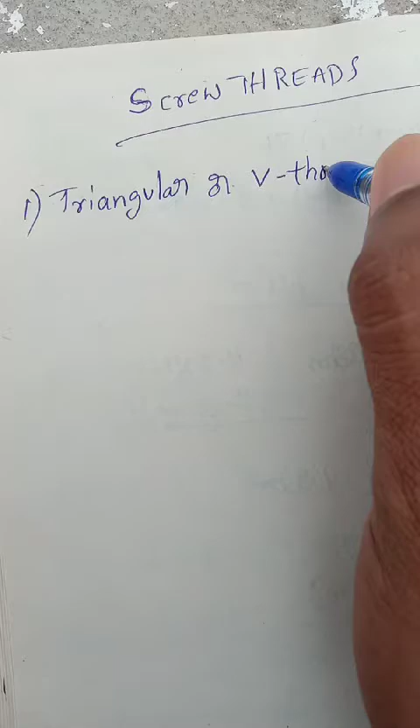స్క్రూ థ్రెడ్స్. దీంట్లో ఫస్ట్ వన్ వచ్చేసరికి మనకి ట్రయాంగులర్ ఆర్ వి థ్రెడ్స్.

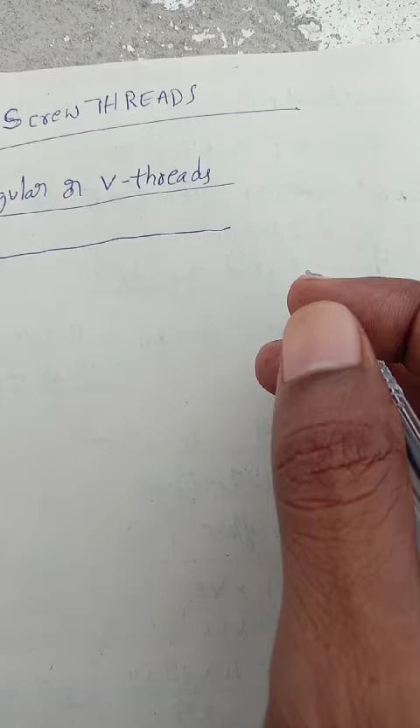ఓకే, నౌ ఈ ట్రయాంగులర్ ఆర్ వి థ్రెడ్స్ ఎలా ఉంటాయి అనేది ఇప్పుడు చూద్దాం మనం. మనకి ప్రాబ్లంలో ఇక్కడ వచ్చేసరికి ఏంటంటే డయామీటర్ ఇవ్వచ్చు. ఓకే, సో దాన్ని బట్టి మనం పిక్చర్ ఎలా డ్రా చేయాలనేది మనం ఇక్కడ చూడాలి.

ఓకే, ఇప్పుడు యాక్చువల్గా షేప్ ఎలా ఉంటుంది అనేది మాత్రమే నేను డ్రా చేస్తున్నాను.

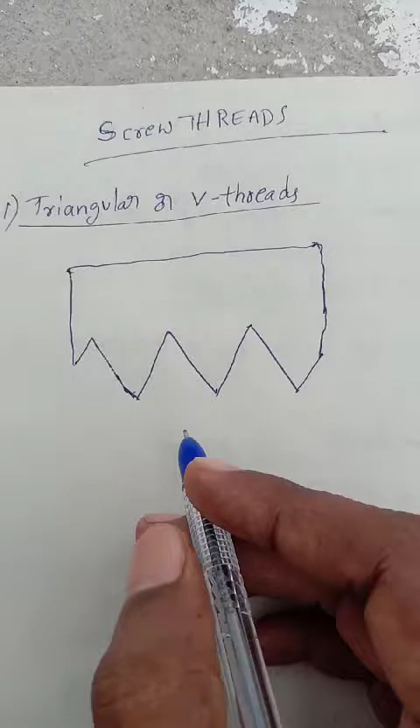మనం చూసుకున్నట్లయితే లుక్ ఎట్ దిస్, ఈ విధంగా ఉంటుంది. ఏదైతే బ్యాలెన్స్ మిగిలిపోయిందో చూడండి, ఈ పార్ట్లోకి మనకి ఇన్సర్ట్ అవుతుంది.

Exactly like this. Okay, this is shape of the thread.

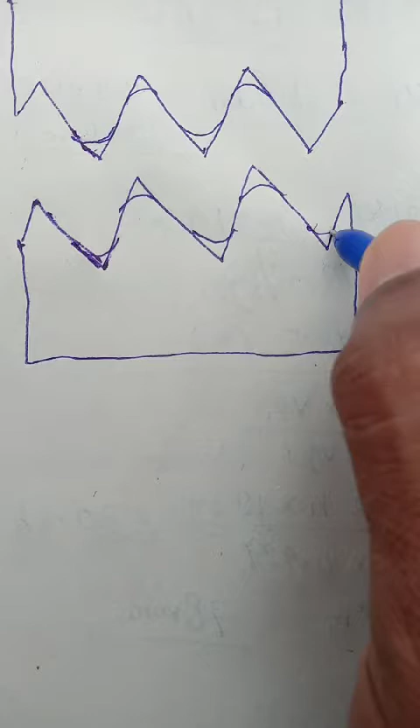అలాగే కింద కూడా మనం కర్వ్ షేప్ పెట్టుకోవచ్చు. అండ్ అగైన్ హియర్ ఆల్సో we can here also. Okay, so this is the thread.

Now here this is internal and this is external.

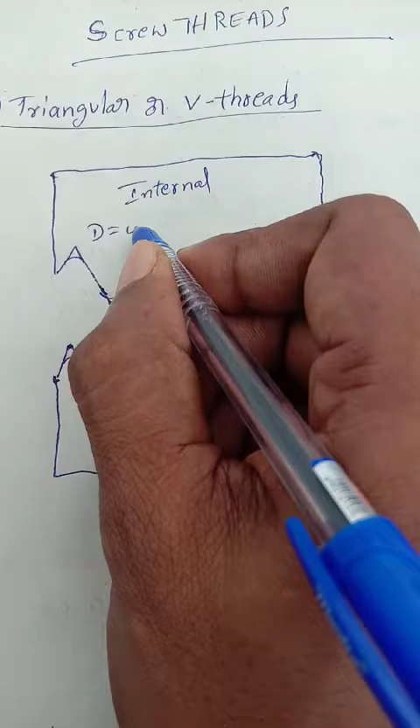Okay, so D is equal to 0.86 పిచ్ అనేది ఇంత ఉండాలి. ఓకే, అంటే మనకి డయామీటర్ కనుక ఇచ్చాడనుకో, గివెన్ డయామీటర్ 20 అంటే 20 ఇంటూ పి. ఓకే, క్యాలిక్యులేట్ చేసుకుంటూ వెళ్ళిపోవటం. అంటే పి వాల్యూ కావాలంటే ఇప్పుడు మనకి 20 డివైడెడ్ బై 0.86 వేసామంటే పి వాల్యూ వస్తుంది, పిచ్ వాల్యూ.

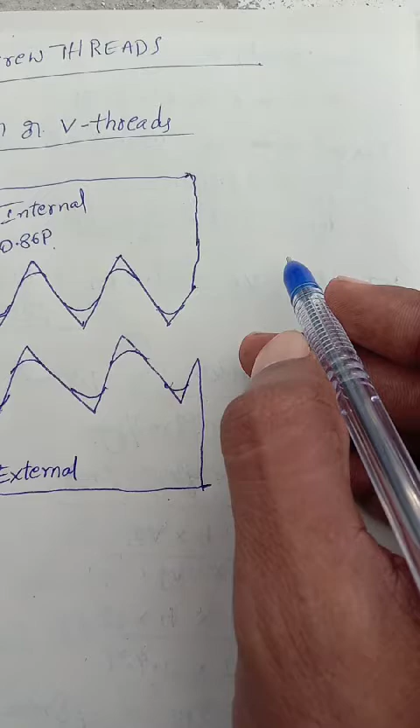ఓకే, అండ్ దెన్ హియర్ ఐఎమ్ గోయింగ్ టు see here D, small d is equal to 0.54 p. ఓకే, స్మాల్ పిచ్. ఒకవేళ క్యాపిటల్ డి ఇవ్వకుండా స్మాల్ డి కనుక ఇచ్చినా కూడా మనం ఇక్కడ ప్రాబ్లం అనేది సాల్వ్ చేయొచ్చు.

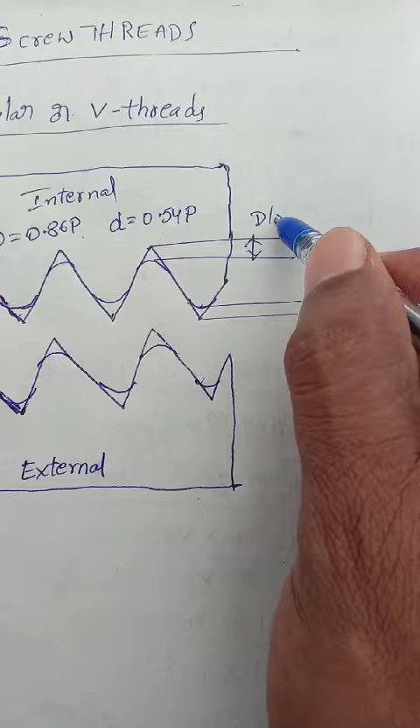అండ్ హియర్ టు హియర్ డిస్టెన్సెస్, అలాగే ఈ వీటికి ఏంటి అనేది ఇప్పుడు చూద్దాం. మనం చూసుకున్నట్లయితే ఇక్కడి నుంచి ఇక్కడికి D/8 డిస్టెన్స్ ఉండాలి. అలాగే ఇక్కడి నుంచి ఇక్కడికి వచ్చేసరికి ఏంటంటే మనకి ఇది స్మాల్ డి, అండ్ ఇక్కడి నుంచి ఇక్కడికి మనకి D/4 డిస్టెన్స్ ఉంటుంది.

ఓకే, నౌ హియర్ టు హియర్ ఈజ్ ది diameter D.

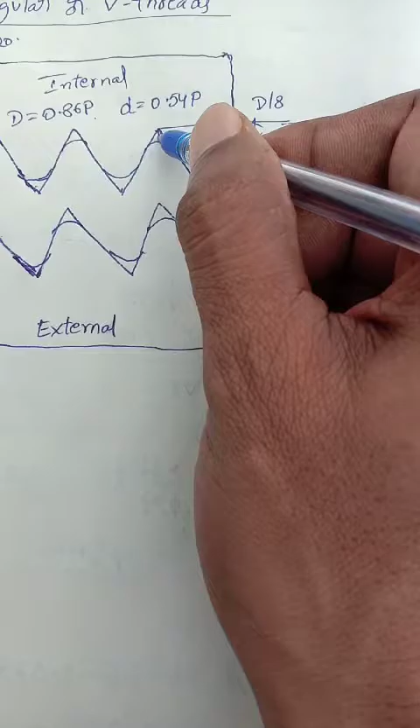Okay, now we need to see what is pitch. Look at this, here to here, అలాగే here to here. The main point is called pitch.

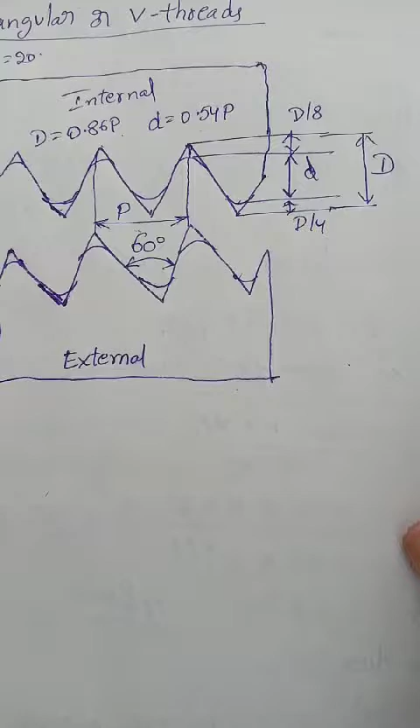Okay, this is pitch, and now here you see in between this angle is having 60 degrees. In between this angle is having 60 degrees, and now we are going to see

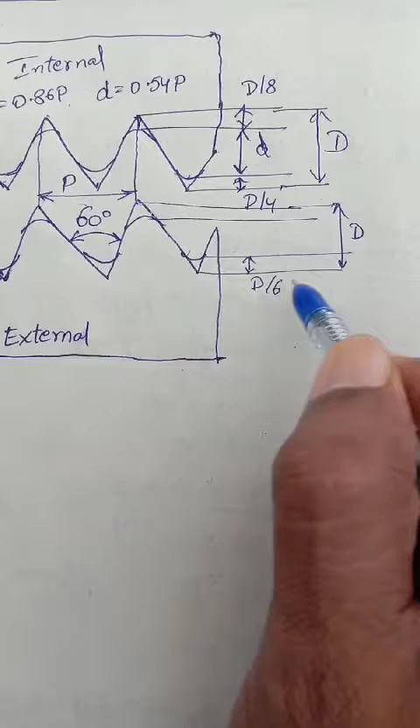similarly this is D, and this one coming from D by 6, so this is similarly D by 8, and now this is small d.

ఎక్స్టర్నల్ థ్రెడ్ వచ్చేసరికి మనం ఈ విధంగా మెయింటైన్ చేసుకోవాలి, D/8 D/6. ఇంటర్నల్ థ్రెడ్ వచ్చేసి D/4, ఇక్కడికి వచ్చేసరికి D/8. వై? బికాస్ దిస్ D/8 ఈస్ ఇన్సర్టెడ్ ఇన్ హియర్.

ఓకే, now come to here, this is equal to same thing 0.86p. అలాగే స్మాల్ d is equal to 0.61p. we take these values.

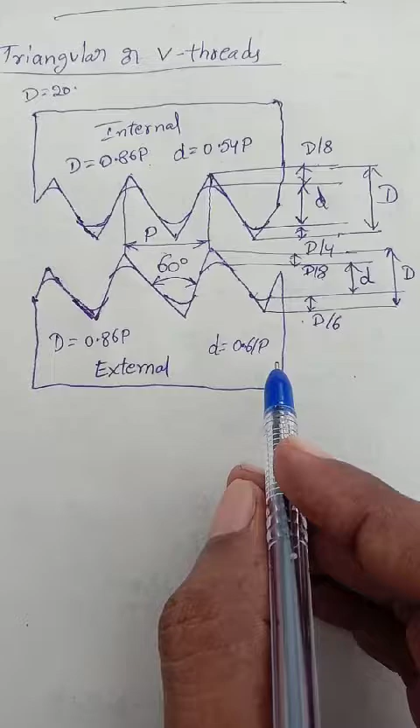So totally this is the యూనిఫైడ్ థ్రెడ్ అని కూడా చెప్పుకోవచ్చు. దీన్ని మనం ఈ టైప్స్ ఆఫ్ థ్రెడ్ని యూనిఫైడ్ థ్రెడ్ చెప్పుకోవచ్చు. సో ఇది ఒక మెటల్ కాబట్టి వీఆర్ గోయింగ్ టు డూ హ్యాచింగ్ లైక్ దిస్.

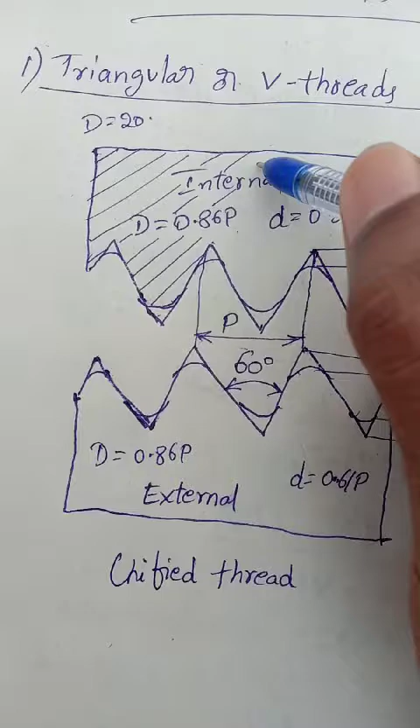So we are going to do the hatching like this.

యాంగిల్ వచ్చేసరికి 45 degrees తీసుకోండి. లైన్ టు లైన్ స్పేస్ యాక్చువల్గా అయితే 2 mm ఉండాలి, బట్ యూ కెన్ టేక్ అవర్ కన్వీనియంట్ డిస్టెన్స్ టు డ్రా దిస్ హ్యాచింగ్ లైన్స్.

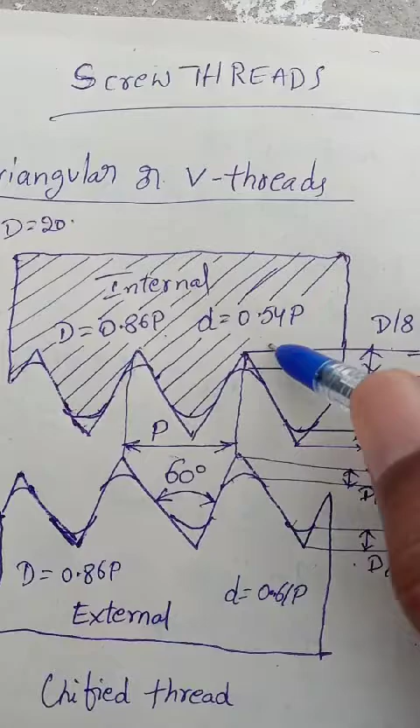అలా అని చెప్పేసి మరీ డార్క్గా డ్రా చేయకూడదు, మరీ లైట్గా కాకుండా మీడియం సైజ్ వచ్చేటట్టుగా డ్రా చేసుకోండి. ఈ విధంగా లైన్ థిక్నెస్ అనేది కొంచెం మీడియంగా ఉండేటట్టు చూసుకోండి.

అలాగే సిమిలర్లీ వీఆర్ గోయింగ్ టు డూ బాటమ్ ఆల్సో. Why? Because this is one part and this is another part. Okay, we show like that, opposite direction. We can draw opposite direction.

ఓకే, ఆపోజిట్ డైరెక్షన్లో మాత్రమే మనం వీటిని యాడ్ చేసుకోవాలి, ఎందుకంటే సపరేట్ పార్ట్స్ వి షో ది దిస్ ఈజ్ వన్ పార్ట్ అండ్ దిస్ ఈజ్ అనదర్ పార్ట్. ఇది చాలా ఇంపార్టెంట్ థింగ్ మనకి హ్యాచింగ్లో.

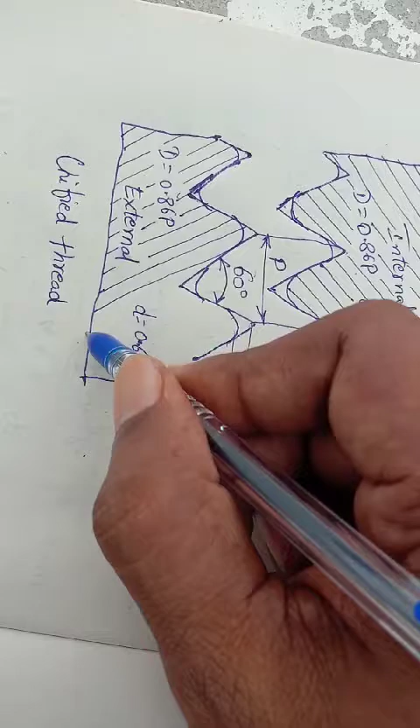Like this. Okay, this is the procedure to draw the triangular or V threads.

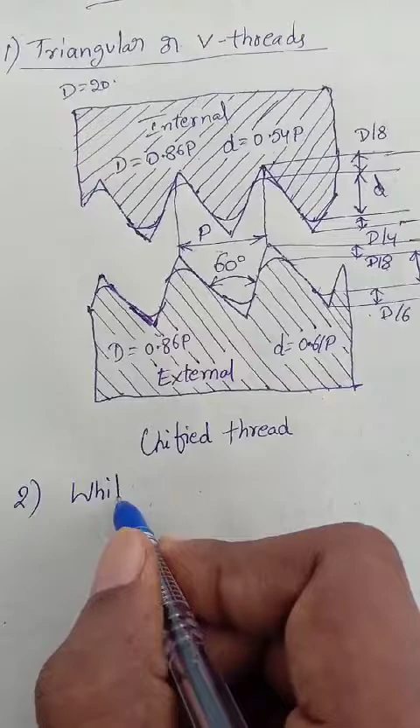Okay, and now we go for another one. It is called Whitworth thread. And next one is coming to here. White worth thread.

Okay, so now we will going to see how to draw Whitworth thread.

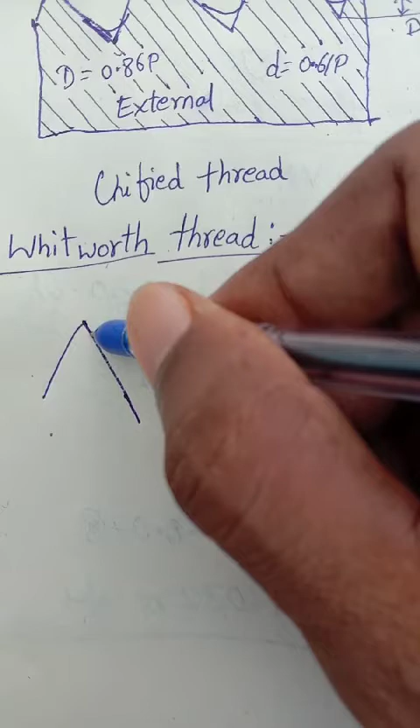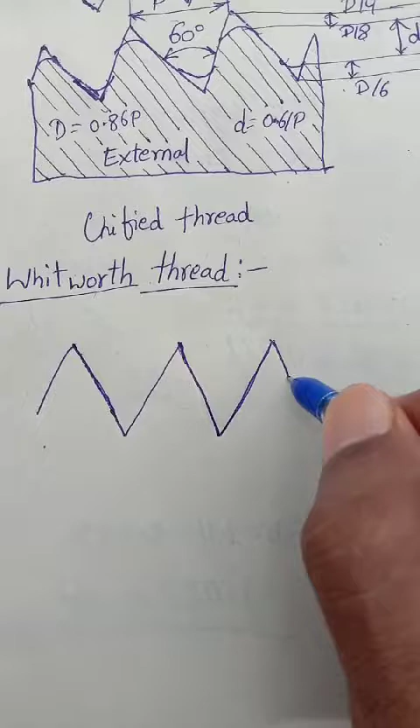This is in straight line, equal size undali. ఇక్కడ కూడా మనకి ఈక్వల్గా ఉండేటట్టు చూసుకోవాలి. ఈ షేప్ అనేది చాలా ఇంపార్టెంట్ థింగ్. మనకి షేప్ అనేది తెలియలేదనుకోండి, పిక్చర్ గీయలేము. So this is Whitworth thread.

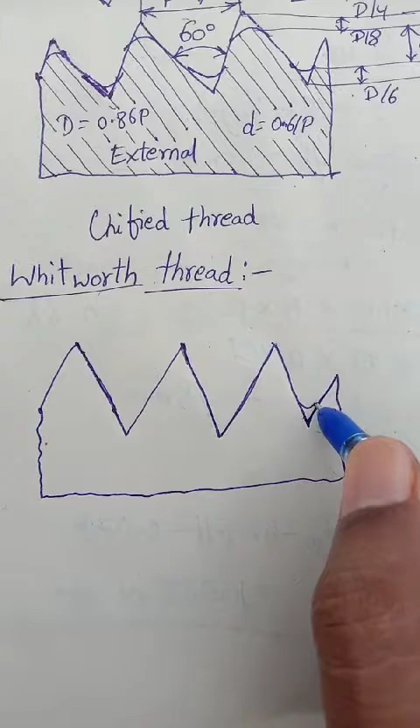Okay, now here this is also same length. And then now here also we draw like this. You know very well this is pitch.

Here also diameter is given. సో ప్రాబ్లం డయామీటర్ ఇచ్చినప్పుడు ఆ డయామీటర్ని బట్టి మనం ఈ టైప్ ఆఫ్ థ్రెడ్ని మనం డిజైన్ చేసుకోవచ్చు.

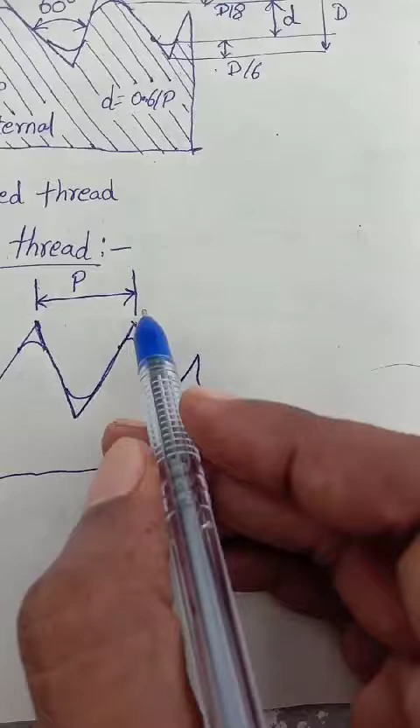లుక్ ఎట్ దిస్ యాజ్ యూజువల్ సిమిలర్ వే. హియర్ ఈస్ D/6. Similarly here also having D/6. So the in between distance is here d, and now this distance is called capital D.

Now small d, pitch is equal to 0.64 p. అదే capital D కనుక ఇచ్చినట్లయితే మనకి 0.96 p.

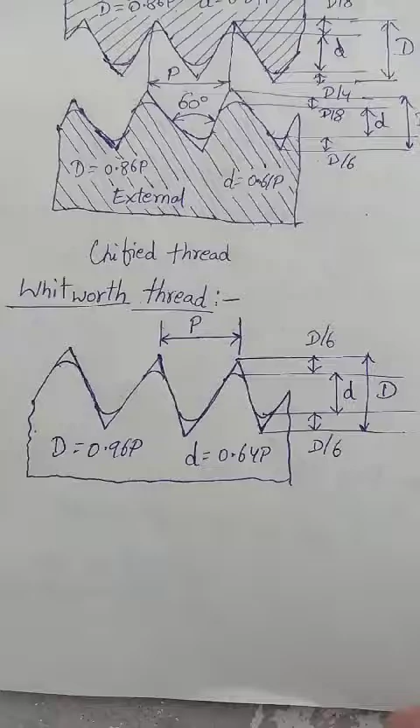Okay, now here in between angle we take in 55 degrees. ఓకే, వైట్ వర్త్ థ్రెడ్ వచ్చేసరికి ఏంటంటే ఇన్ బిట్వీన్ యాంగిల్ మనకి 55 degrees ఉంటుంది. ఓకే రైట్.

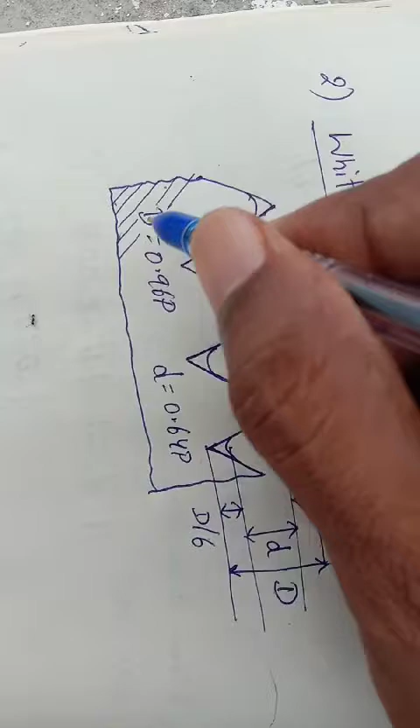సో నౌ వీఆర్ గోయింగ్ టు డూ హ్యాచింగ్. Like this.

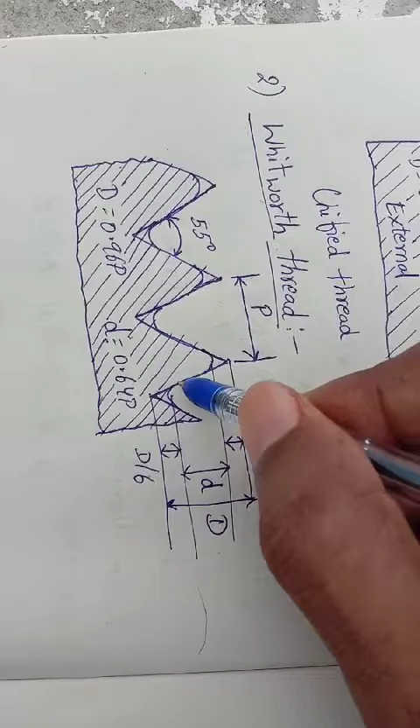Okay. Like this. Okay.

So now this is called Whitworth thread. Okay.

Now we are going to see next one is called Sellers threads. Now here Sellers threads. Now we are going to see how to draw Sellers threads. Okay, yeah. Take here.

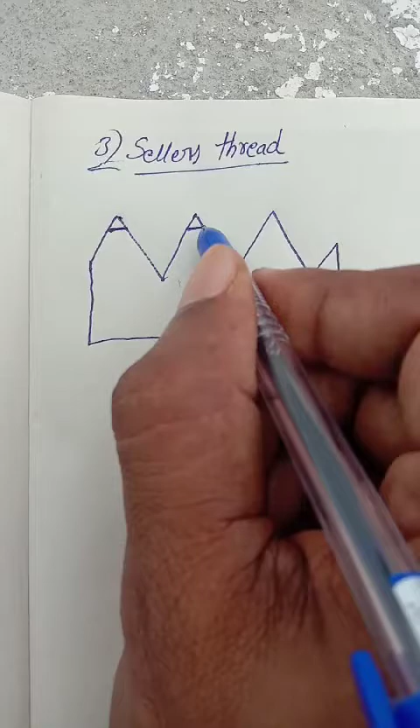But here look at this, since Sellers threads it's having straight line. That is the difference between previous threads and this one. Okay, so you can see that in between angle is 60 degrees.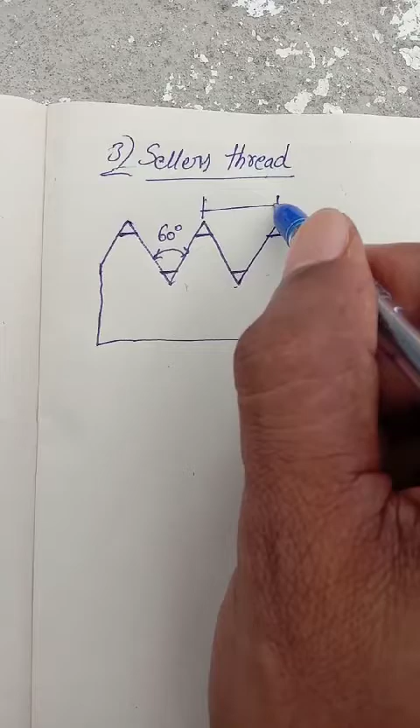ఈ పాయింట్ నుంచి ఈ పాయింట్కి యాస్ ఇట్ ఈస్ పిచ్ ఇవేవి మారవు. ఓకే,

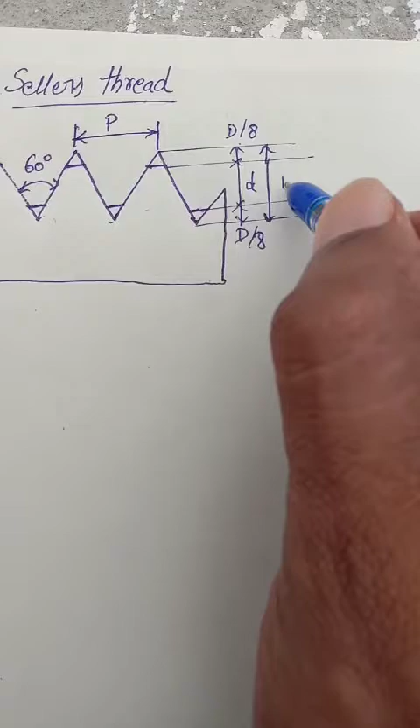So what is the distance we need to fix here? So this is d by 8, small d, and similarly here also d by 8, and then now this is coming from d. Thus we know.

Again here d is equal to 0.86 p. Now small d is equal to 0.649 p. So this is the design of Sellers thread.

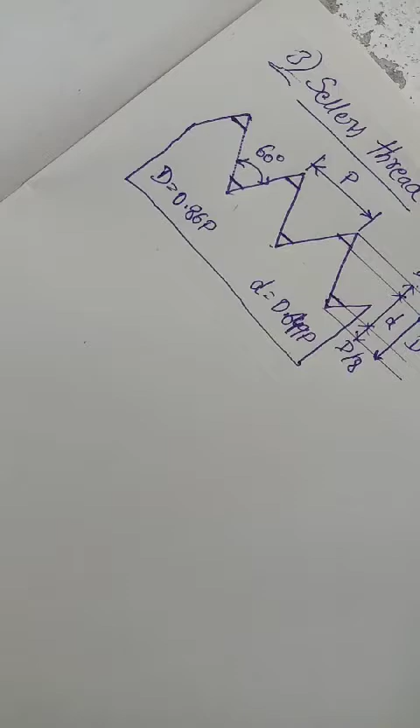Now here we are going to do hatching. Okay, now I am doing hatching like this. Yes, okay, it gives clarity.

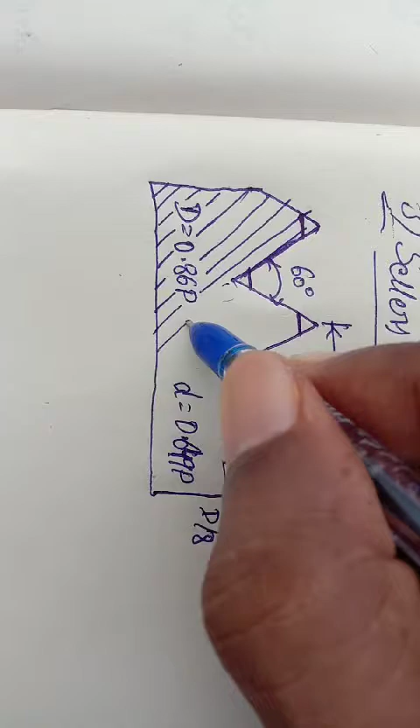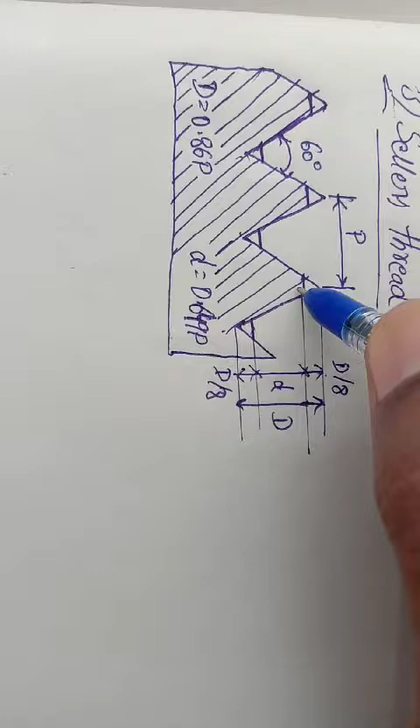See the difference of lines - that is the most important thing. I draw the hatching line very thin.

Okay, see this. So this is the Sellers threads, and now here I write down this is Sellers threads.

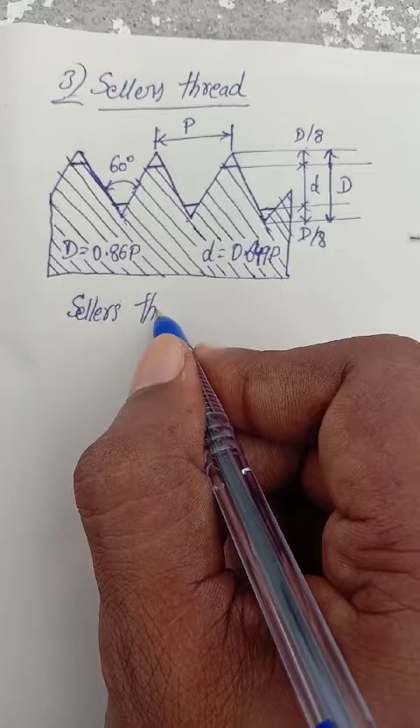Now I am going to see here British Association thread. Now the fourth one I put it here: British Association thread.

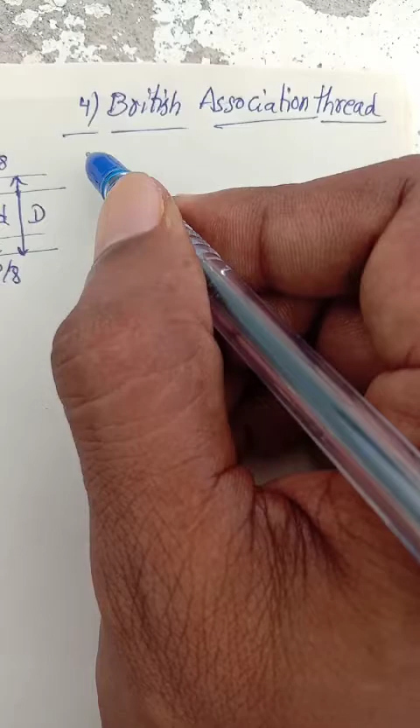Okay, now we will see this one, how we will draw it.

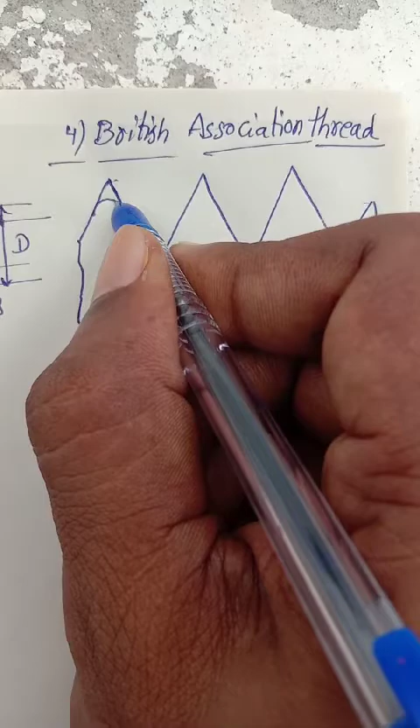Now this is the cutting piece. So here we look at this circular shape - it will have more of a circular shape, it will look like this.

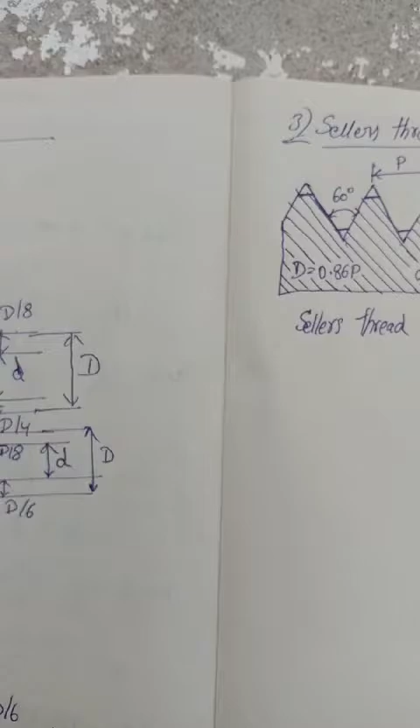The difference is here is a small point. Here we take a small circular shape like this - here is small, but now here you will take it larger, some amount of semicircle. At the same time, this angle in between is very less.

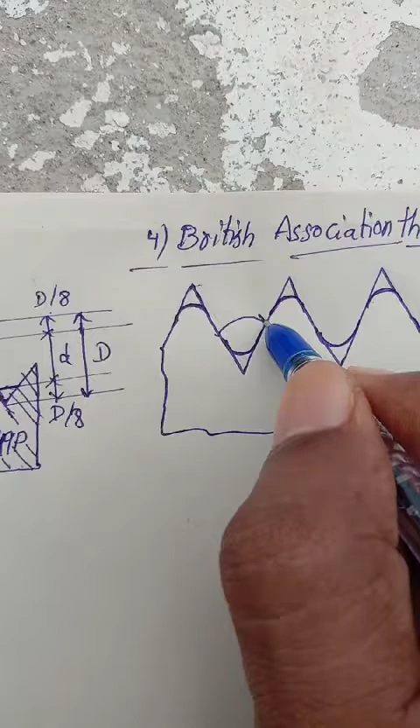47.5 degrees, and then here to here is pitch. Okay, and now we go for the distances in between.

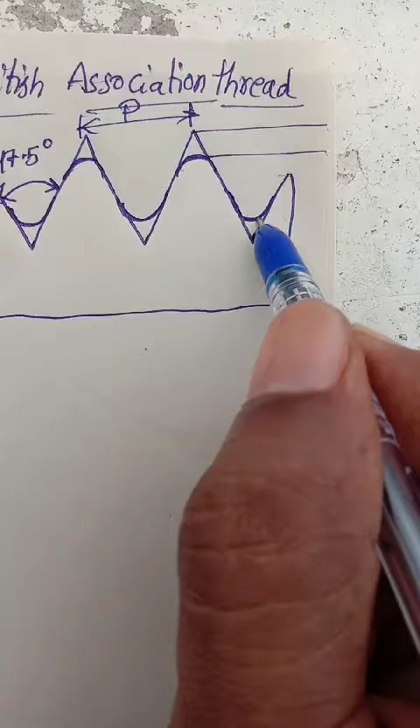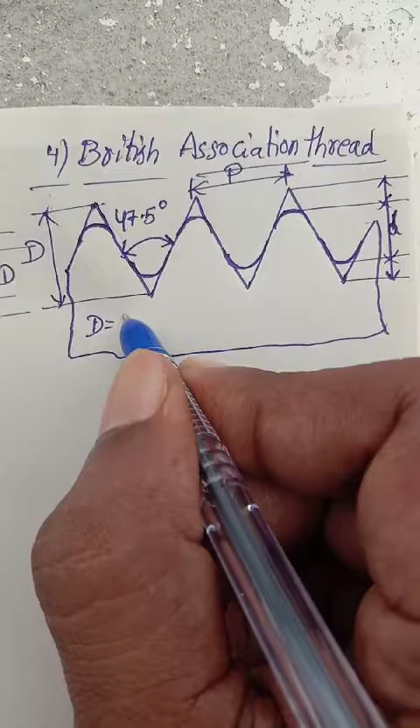So we are going to take this thing, and now this is small d as usual, and then here to here we know very well, capital D. Then D is equal to 1.136p, and small d is equal to 0.6p.

Now here to here the distance is same, so that we take 0.236D. So this is called British Association thread.

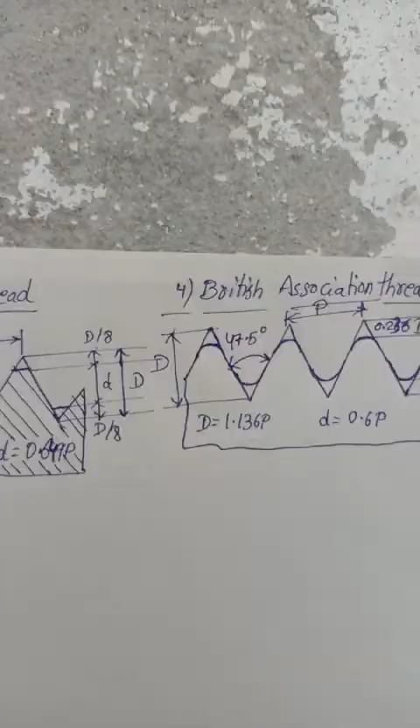Okay, so now we are going to do hatching. So take this.

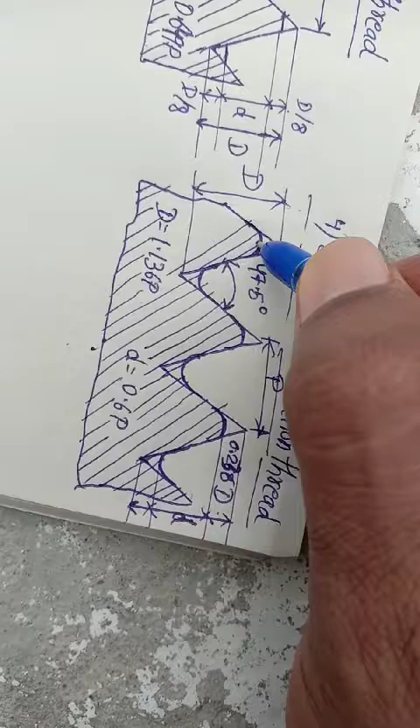Okay, and now here also, and then now complete this thing. Okay, so this is British Association thread.

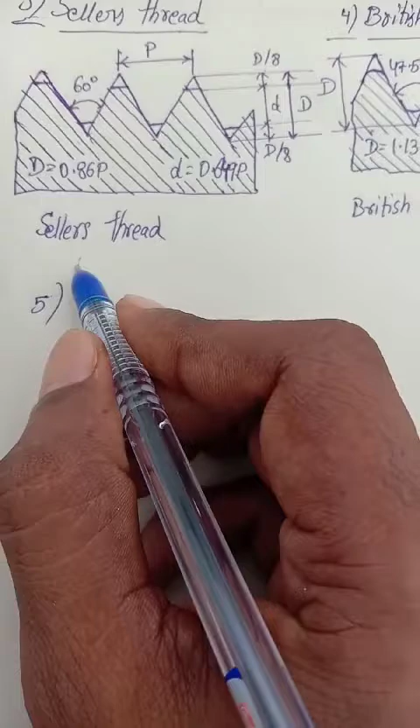Okay, and now we go for another one. The fifth one is square thread. So then here I am going to draw a square thread.

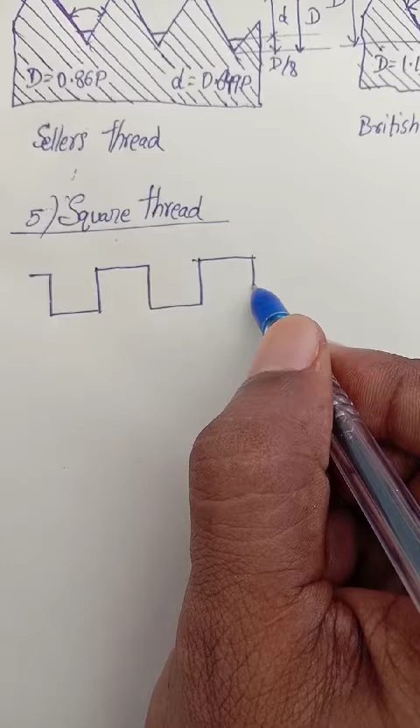These all are equal square threads. And then here to here is 90 degrees angle, we know very well.

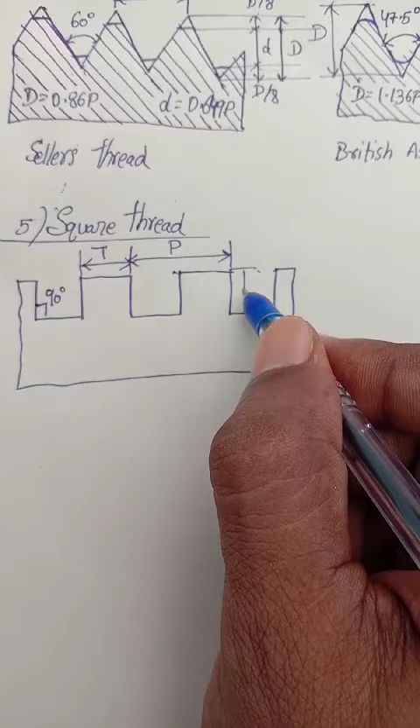And now this is called T, that means thickness. This is P. Now it gives D like this, and now here T is equal to D is equal to 0.5 pitch.

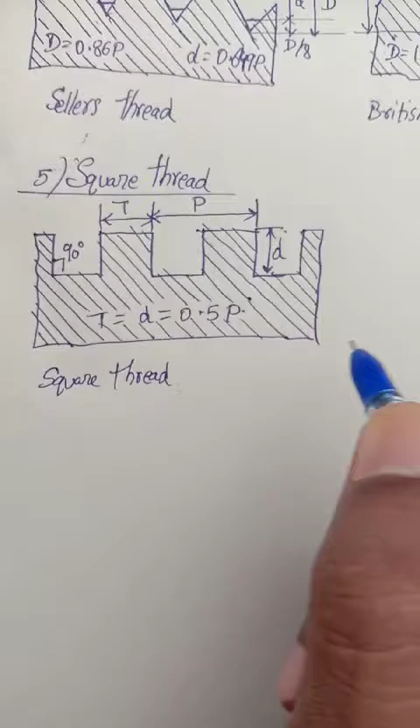Okay, so this is square thread, and now we are going to see here another one which is also like square but not square.

This is called Acme thread. Okay, and like this.

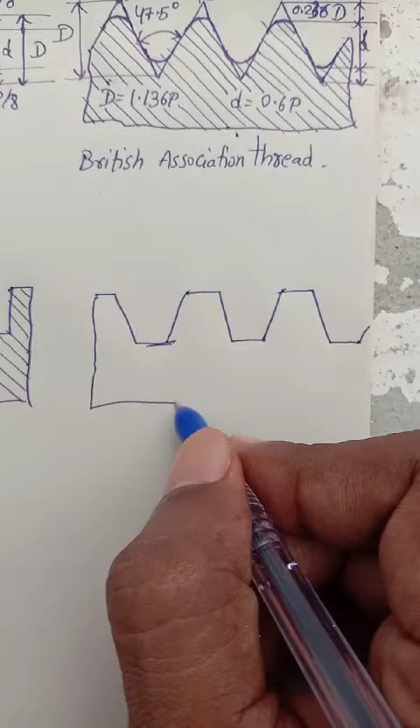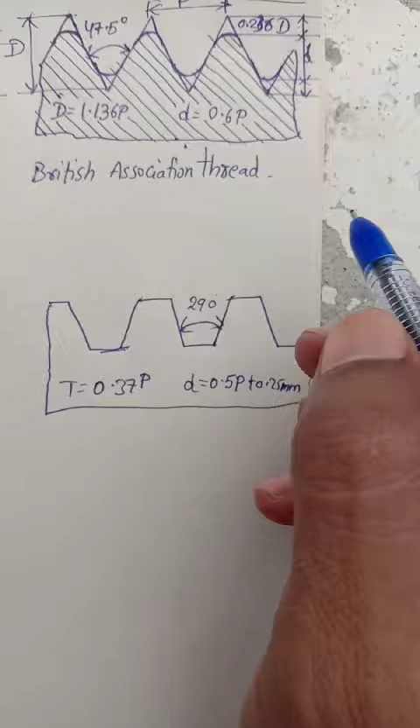Now we go to see here. So this is T, this is P, and we know very well this is called D. Here to here the height is d. So this type of thread is called Acme thread.

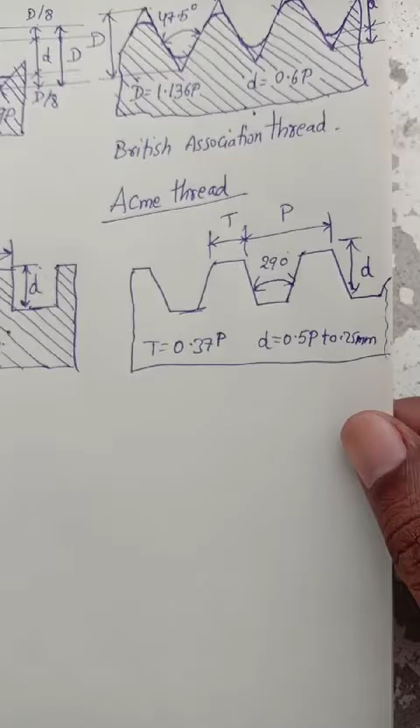Okay, and now we go to hatch. Then we are going to do hatching.

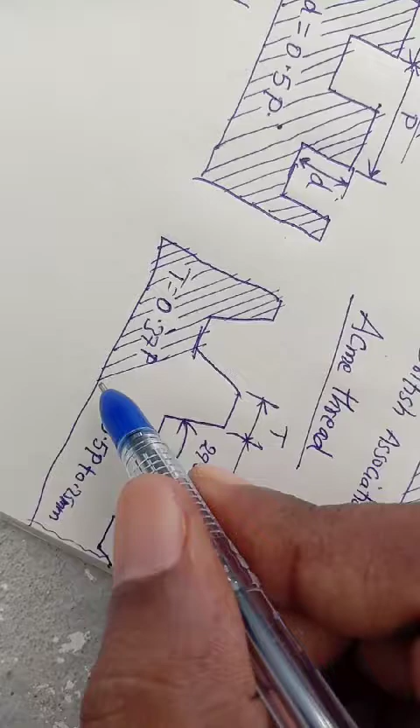I'm going a bit fast, because we know very well how to draw hatching. So this one is called Acme thread.

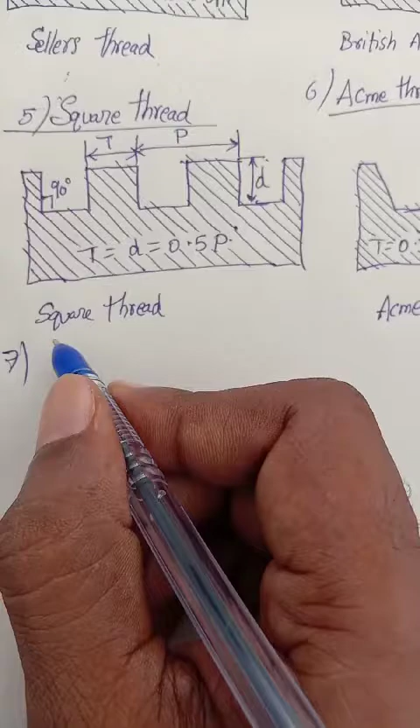Knuckle thread. So the seventh one is called here knuckle thread. So we see how to draw knuckle thread.

It's actually look like a square, but somewhat like this design. It will show like this.

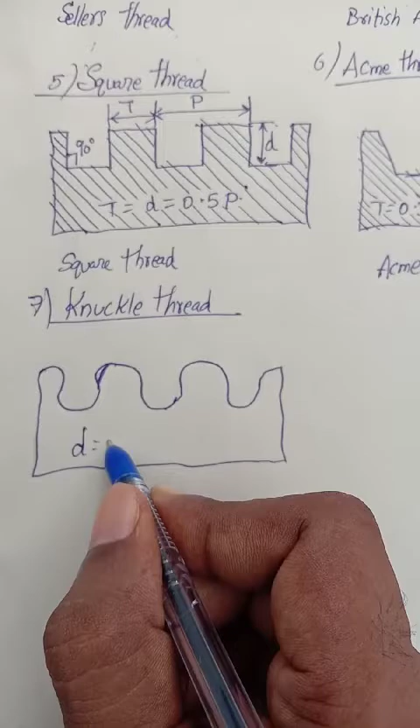Okay, D is equal to 0.5p, and now radius here, okay, that is equal to 0.25p. Now how we put radius is called here, this is called R.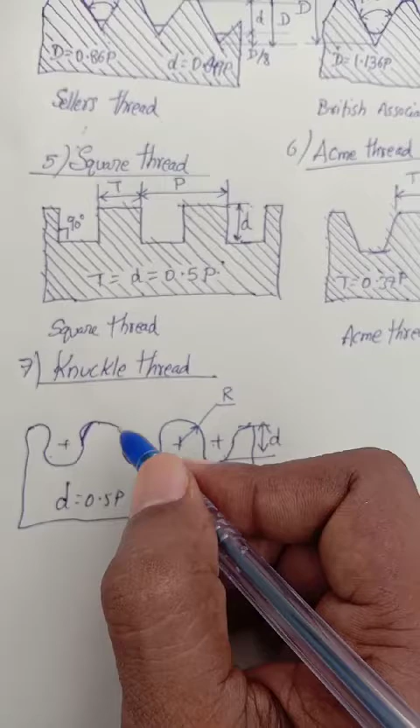And now then here to here is coming from pitch. Okay, this is the knuckle thread. So now we are going to hatch.

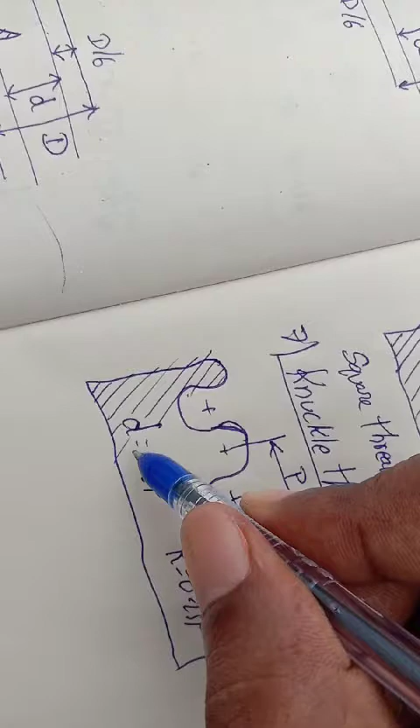See this, I am going a little bit faster. Now we know very well about hatching, so that's why like this.

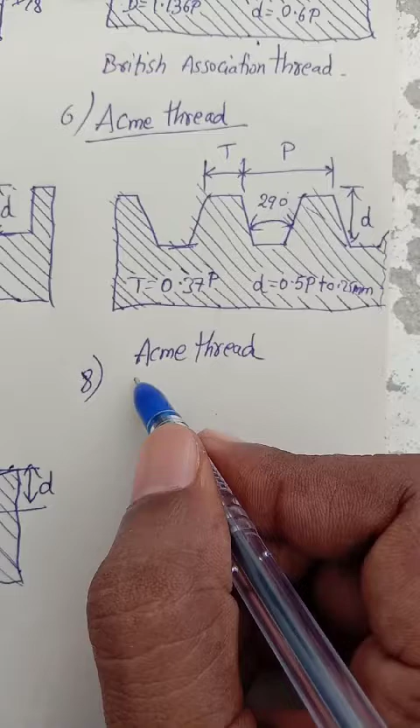Okay, and the next one is the last one, that is called - we are going to know about buttress thread.

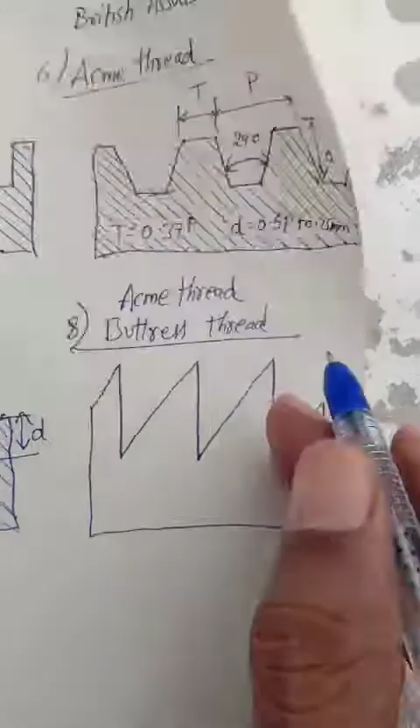Okay, now see here how to draw buttress thread. See this is called buttress thread. The shape is like this.

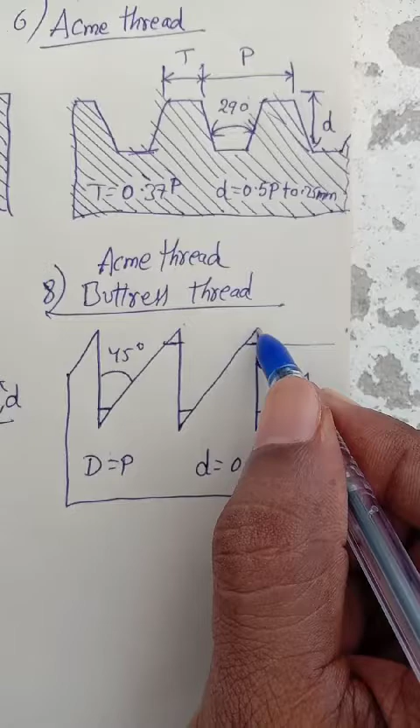Now this is called F, and now here the distance is there. So you take this as D by 8 on both sides. Here also we take D by 8, and then we know very well.

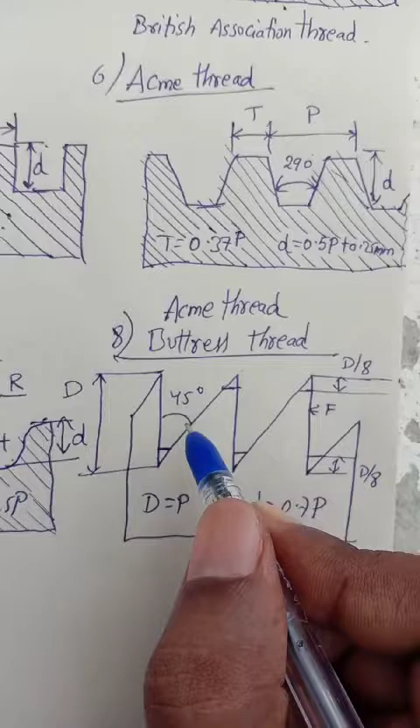I am going to draw here. So this is capital D, and then here to here, okay, this is called small d. Okay, so this is the buttress thread.

So here what is important is, F is called force acting on arrow. This is the force acting. Okay, I'll show the force acting here.

So now going to hatch this thing.

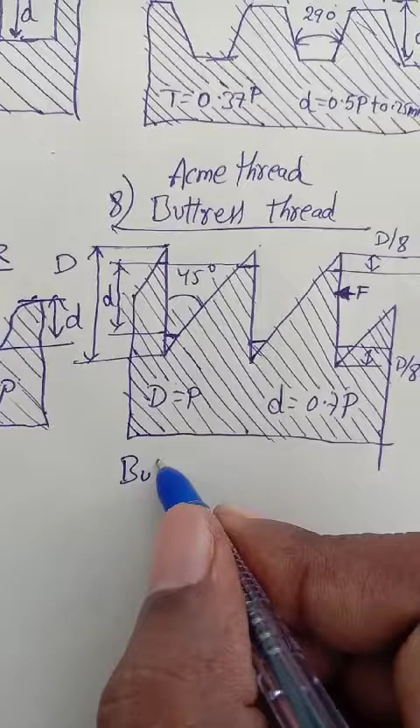Okay, so this is the topic of screw threads. So totally we have 8 screw threads: one is triangular with Whitworth, square, British, square, Acme, sorry, Sellers, and knuckle buttress.